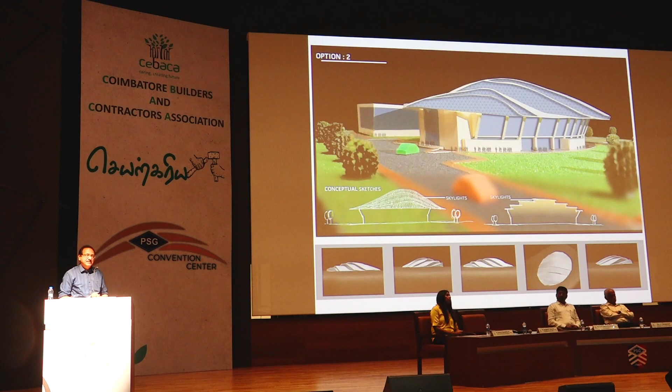We are discussing on the models, and these sketches came in, and this is the kind of model which was fully finalized. I made a little something which, as Dr. Savan said, looks very simple and elegant.

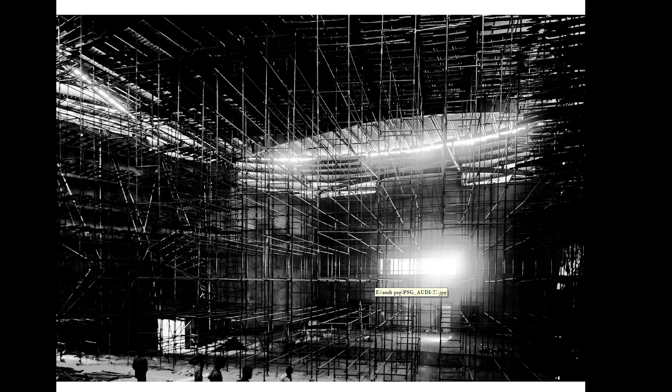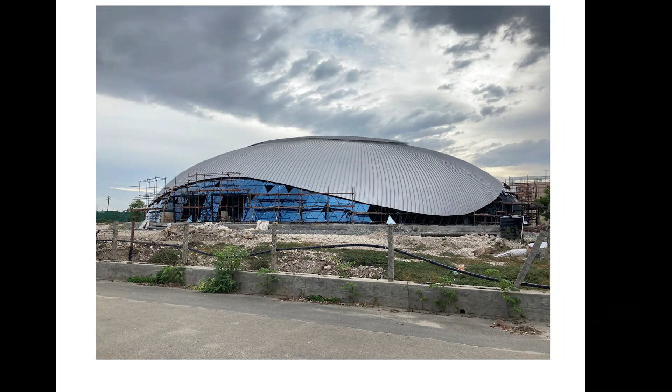And the other issues and problems which we went through, my 2 partners will tell you next. Just giving you how many people have contributed, how many people have worked on it so meticulously. The scaffolding was looking scary, like anything can fall, anything can be damaged. But this picture was so beautiful, it showed the evolution of making. Every moment, the way it came up, all of us enjoyed.

The final outcome, I'm very proud of each person, right from the labor, right from the engineers, the consultants. Fantastic. This I did in Germany, and they all agree, yes sir, it can only be in Germany. I said, no, it's in Coimbatore.

How an architectural piece puts a city on the world map. There's a place called Azerbaijan, have you heard of it? It requires a great applause for the opportunity which he gave us.

It is the client that reposes his trust. More than money, he reposes his trust in a person all the way from Chandigarh and says, Sanjeev, do it. That is one of the rarest of rare creatures ever made - the client when you trust. And nothing without my team. Dr. Jagopal, genius, most respected, and I think this was not possible without him. Thank you very much for it. Thank you.

So, as Sanjeev sir already told, it was a team that we all worked together, and it's a long journey that we all took up, and I don't know where to really start with. It's a lot of stories, lot of memories. But given the time constraint, I'll cut short a few of the very good moments and few very key points that we all went through. And as civil engineers, as architects, as interior designers, what are the major constraints and what are the major issues that we dealt with is what we want to see today.

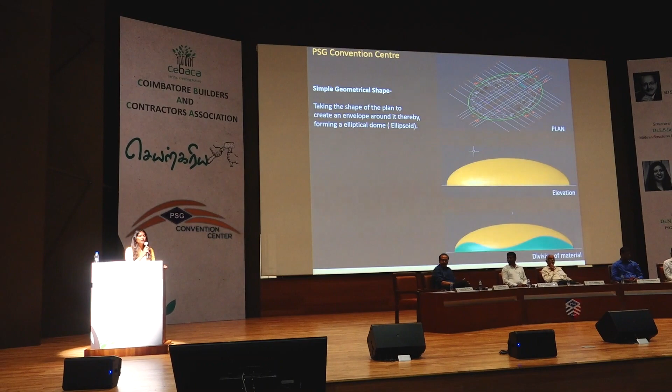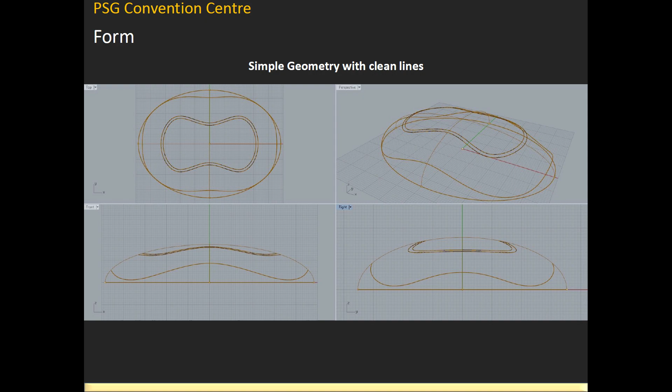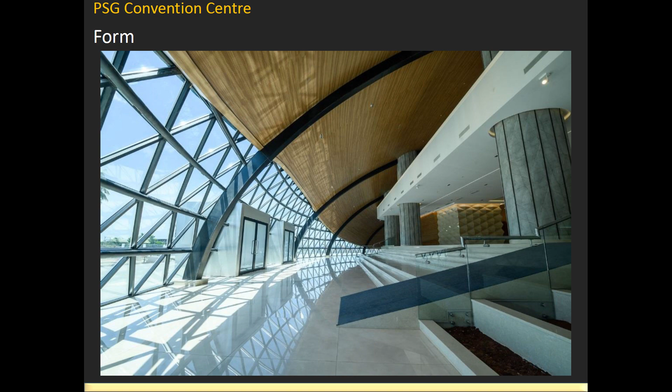Once you enter in, you need to have a great feeling of connecting the outer space to inside rather than being in a dark space with artificial light always. So therefore, all the four corners, we decided to go with the kind of glass facade. And as you see in the corners where the surfaces come, we simply got the roof down.

So this was our final rendering that we submitted to the managing trustee. Of course, it was totally his idea, his brainchild. We just did the entire thing and put it into a drawing, which was finally approved and which is what is standing today right here.

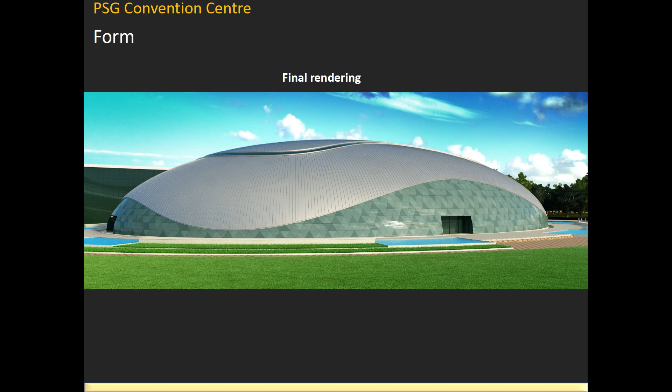And when this form was done and finally approved, after all the forms that we thought about, the first person I went to was S.G. sir.

It was a very complex structure. From this point, we didn't know how to proceed further in terms of structure. Sir, obviously being a genius, made it very simple for us. He told us we have to follow and divide the complex geometry into simple lines and simple geometrical arches.

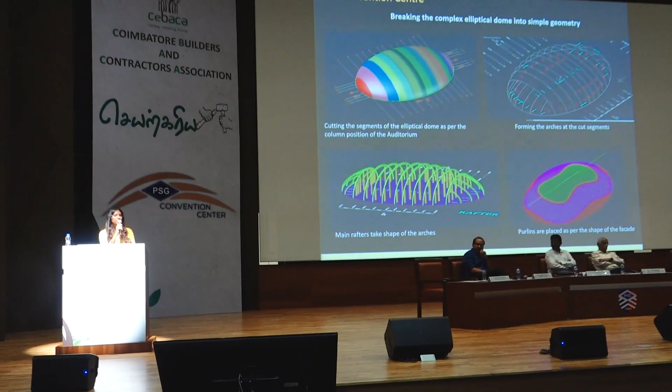So breaking the complex elliptical dome into simple geometry is what we did. We took the form, and based on the column positions, we divided the segments. Forming the arches on the cut segments, we developed the arches. Sir, based on his guidance, we did the model.

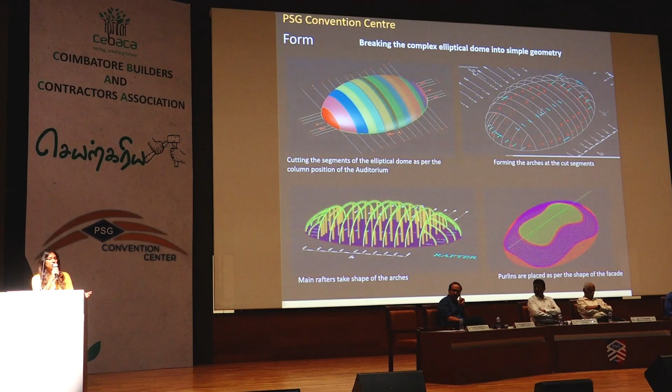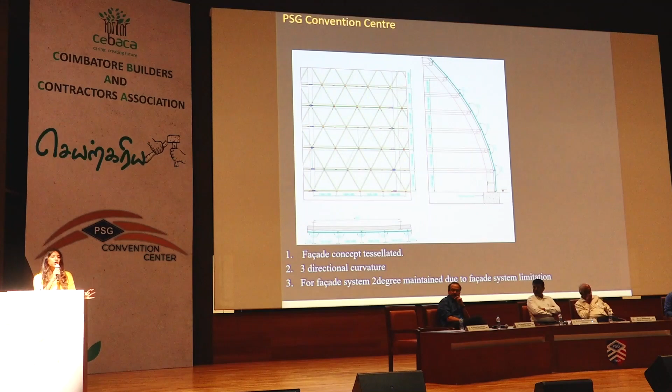And then the same lines were converted into the main rafters. On the main rafters, sir said we had to place the purlins to take the shape. What was very difficult and complex for us was the design of the facade, the glass facade.

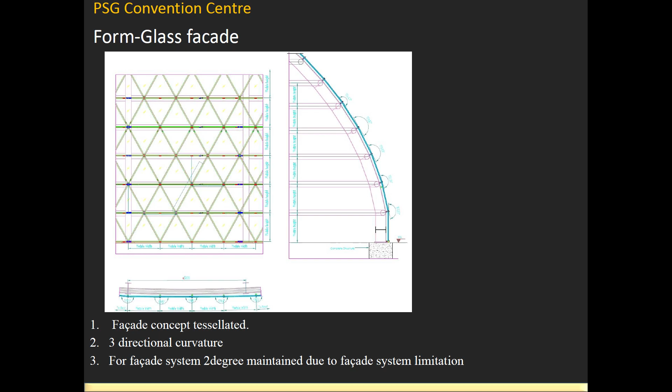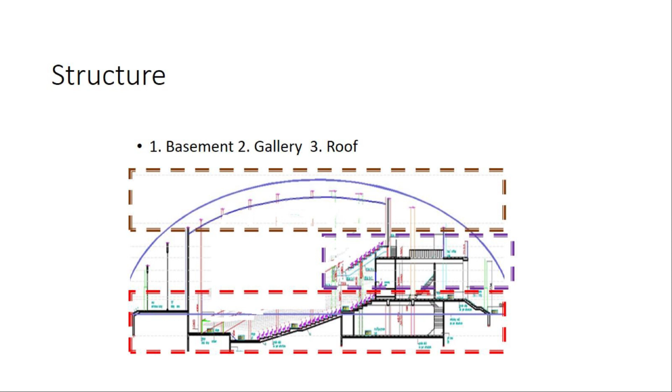This gallery is around 36 meters long and 12 meters wide.

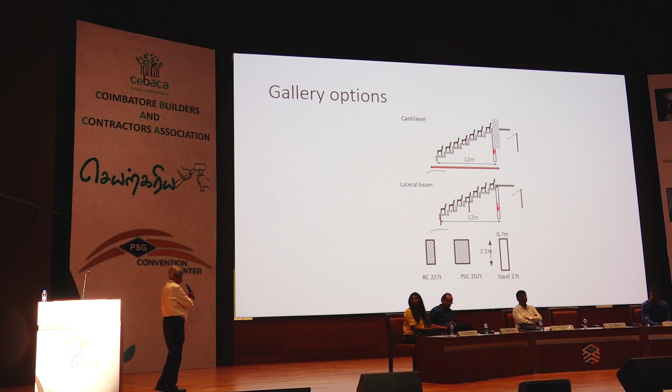Two beams. For the beams we have got three options. One, we will go for reinforced concrete. When we go for reinforced concrete of 36 meters, it was 227 tons. Then the next option was pre-stressed concrete, 207 tons.

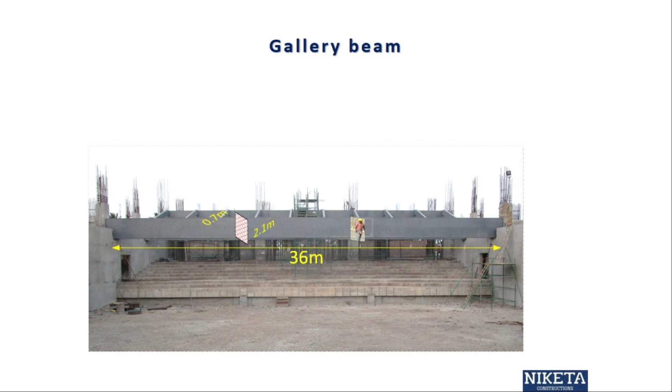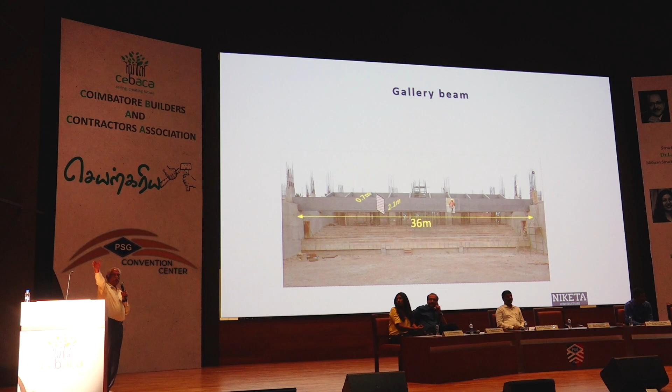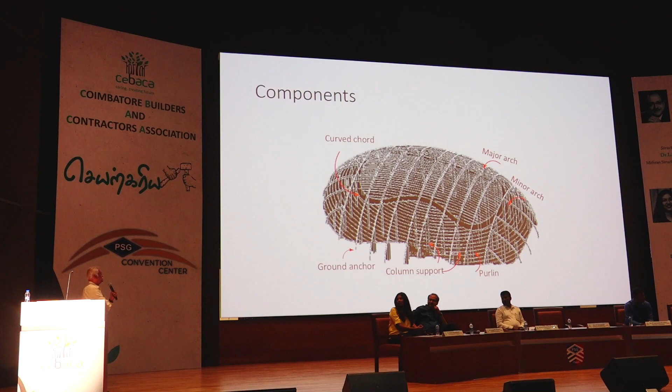The structure has that much depth - around 7 feet depth and 2.5 feet wide. These 3 girders have been kept, 36 meters. You cannot see anything on the balcony now. There are 12 rib bones here. Out of the 12 rib bones, 8 are active and 4 are passive. Our structure also has 8 rib bones, placed next to each other like this. So this is the structure we have.

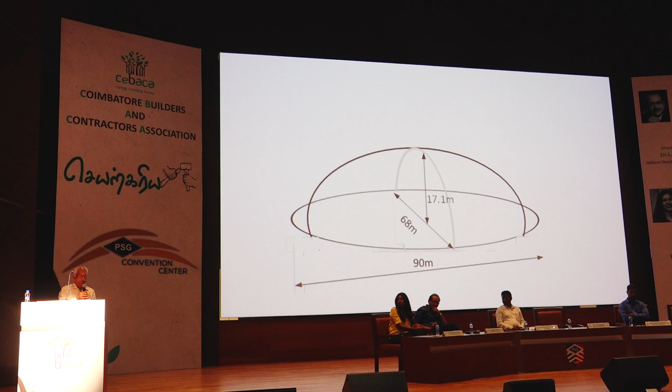Next piece. So this structure, the total dimension of this building is 90 meter by 68 meter. The height is 17.1 meters. Convert to feet if needed.

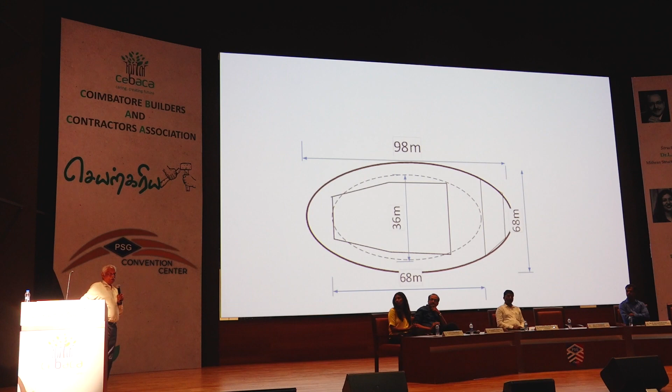Now in the gallery where we are sitting, the part without support is 68 meters by 36 meters. Doing a 68 by 36 meter truss is not very difficult. But here our rule is that my structure height should not be less than a meter. So because of the structure above, this height was achieved. The height has been created because of the structural design, how it has been done.

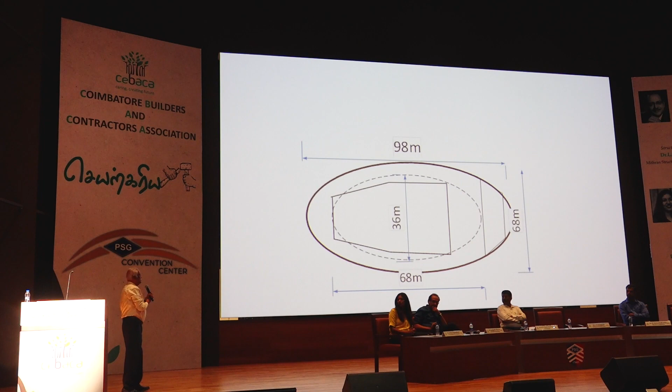Next please. It is done as an arch. Those who know structural engineering or structural mechanics will know - an arch is a structure which is under compression. So this arch has been done. Even a small deviation and the structure won't stand properly. So credit to our armor group, who have done a wonderful job of creating these arches.

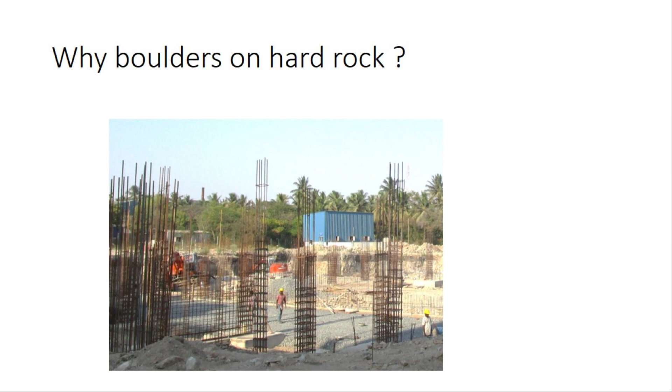Why boulders on hard rock? So this is the first step - we have put the boulders on the rock. Water will come through the boulders. Where the boulder height is high, there will be water pressure. Due to the water pressure, there will be crevices in the rock. Through that, the water will ooze out at the lowest possible level.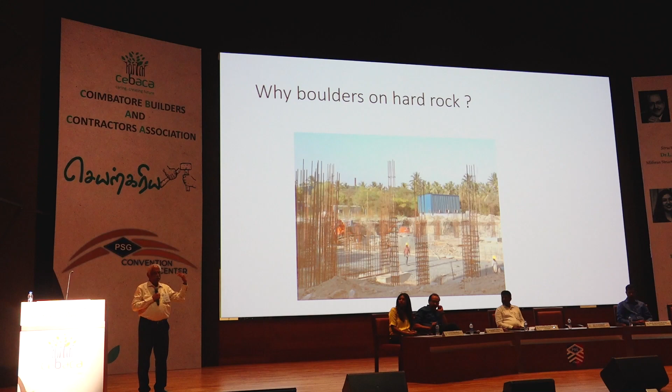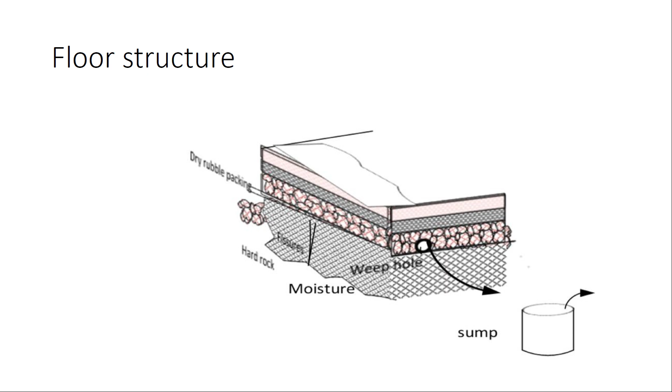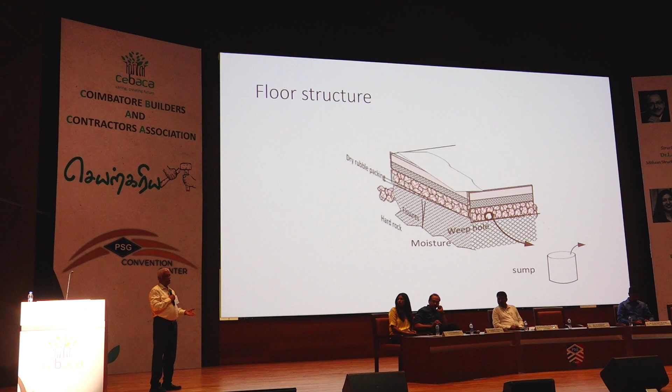We thought about what to do for that. Next please - what have we done? On the fissures, we have done dry rubble packing. Only rock is needed, not glass, not ordinary soil, not gravel. So this way, moisture will not come up through the dry rubble. We have put a weep hole and we have put the sump.

Next question is to the principal architect, Sharma sir. Is there a possibility of this facility being shrunk or expanded? I really hope not - we have all worked very hard on it and we don't want to work anymore.

No, it can't be expanded because of the shape of the auditorium and the structure system. I don't think we can go vertical, and because the space is limited, we can't go horizontal either. So if your question is can we expand it - no. If the management had given a limitless acreage of land and asked you to design an auditorium like this, would you still have perceived the same form? Or are we trying to understand whether this form was a function of the constraint in space?

No, two aspects to this, sir - I think I forgot to mention that. When you are seeing it from Avinashi Road, from far, any other structure like this would obstruct the vision. So the whole logical architectural solution was to have something low profile and curved so that I don't limit my vision to see the buildings behind.

In any case, the glass is there, but the heat comes in through the corridor, and if not managed, it may hamper the audience inside. So that zone itself is the climate zone which does not affect the people or the performance inside.